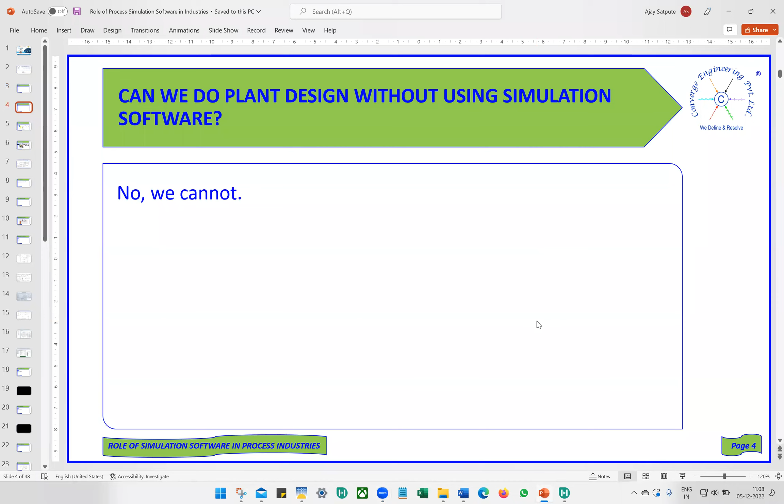To answer this question, the simple answer would be no, we cannot. And probably we can conclude this session with this answer. But anyway, we are going to spend another 30-40 minutes discussing why we cannot.

Right? So let's take this simple example. Actually, I had planned last weekend to give a detailed presentation on what are the different softwares available, when they came in the market and how they progressed. But while I was preparing that presentation, I myself got very sleepy. So I thought I should not do that with you guys. I made this thing very simple instead.

Whatever project problems I have come across during my 20 plus years of experience in process industry, I have taken a few. And with those examples, those project problems, I'll be making my point on why simulation softwares are important, and we cannot really do anything without using the software.

So in this particular example, benzene, there is this vessel which is operating at say 1 bar gauge pressure, you see here, and we want to load it to say some road tanker or send it to some other place at 30 meter cube per hour and at say 4 bar gauge pressure. So when I say that we need to design this system, I mean I need to design this pump, right? I will decide what is this pump suction line size, pump discharge line size, what is the pressure drop. You can see there is one control valve.

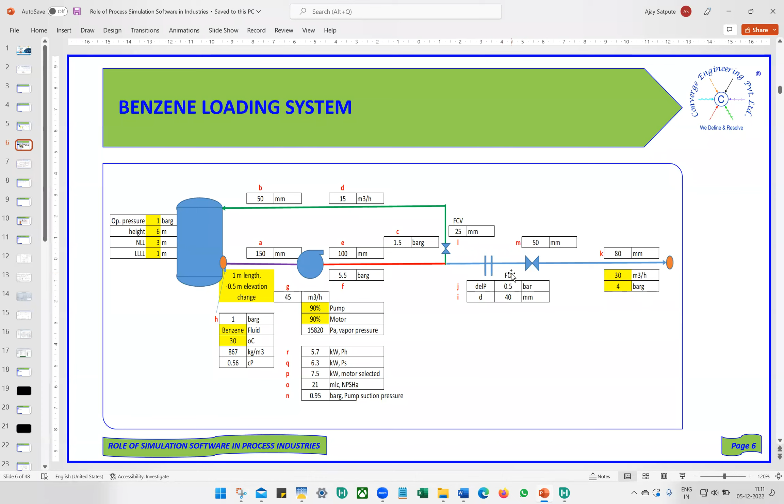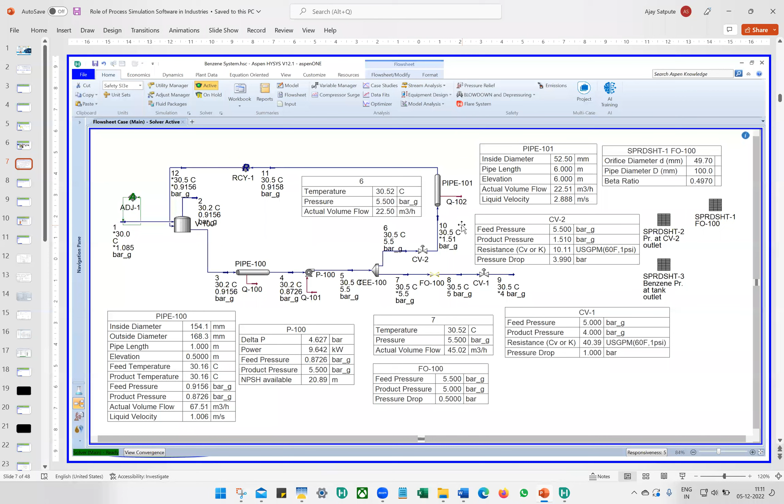Also we can do the same thing using Aspen HYSYS or any other commercial software. So we have this pipe 100, that is the pump suction. Then there is this pump. So we can find out what is the NPSH available. We can find out what is the head required for the given flow rate. And then this minimum flow control valve sizing we can do. The level control valve sizing we can do. The sizing of pump discharge, then pump minimum recirculation line.

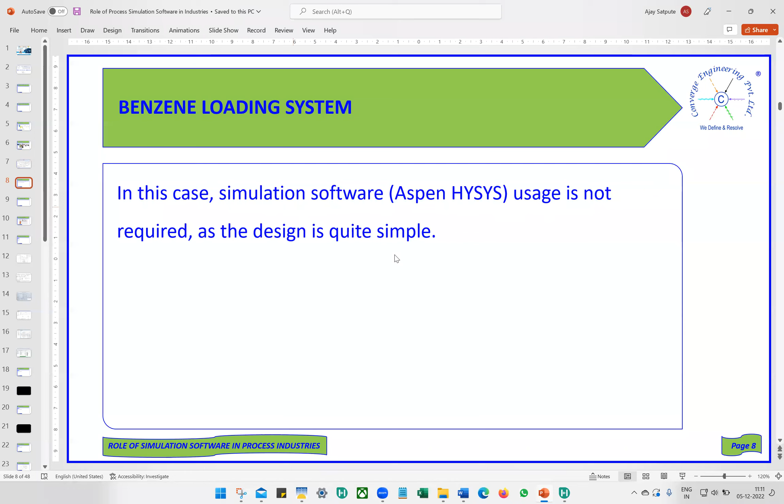So all this sizing we can do using Aspen HYSYS. In this particular case, simulation software like Aspen HYSYS usage is not really required, as the design is quite simple. So let us make things more complicated.

So we have this early production facility. In oil and gas, you cannot really do away with early production facility, or EPF. So whatever 2-phase or 3-phase fluid that comes out of the earth in the oil well, it goes to this...

Christmas tree, so there is this valve, choke valve. Upstream you can imagine very high pressure, say 5,000 psig, and downstream the pressure would be 500, 600 psig. That goes to the separator, preheater, heater. So it goes to many, many places.

The objective of this early production facility is to separate the gas, oil, and produced water. Oil is sent to the refinery. Produced water is again pumped back to the same reservoir. And then gas, if it is useful, meaning if it makes sense to process and purify it, then it is done. Otherwise, it is just burnt.

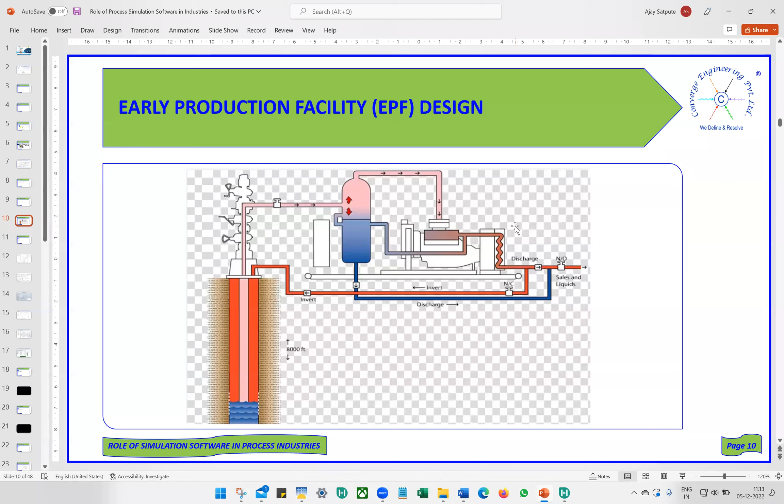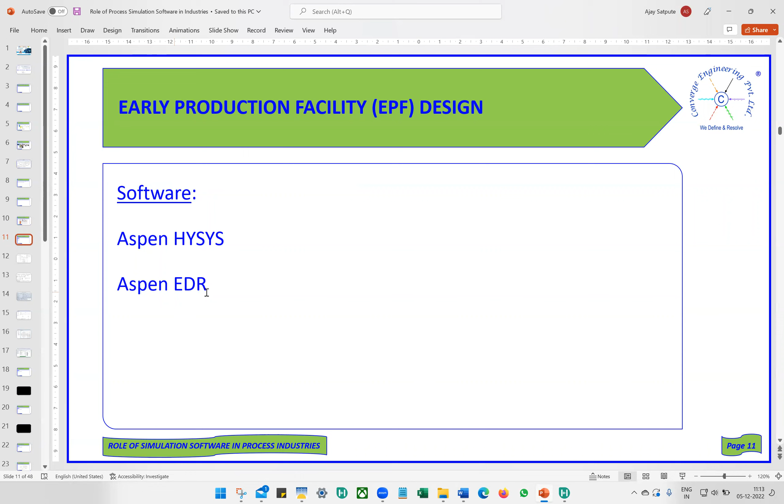So this kind of design of early production facility, we usually use Aspen HYSYS and Aspen EDR. Aspen HYSYS for the process simulation, EDR is for the heat exchanger side. So this is, you can say, a simple P&ID for the same system.

From the oil well, you have this 2-phase feed, oil and gas, which goes to the preheater, a shell and tube heat exchanger. Then it goes to the heater, and temperature is increased. It goes to the separator. Vapor goes out through the vapor line through the pressure control valve, PCV, and oil is pumped out using these 2 pumps, one running, one standby. It goes through the flow orifice, then to the LCV, level control valve. Then through the preheater, it goes out to the storage tank, or wherever it needs to go.

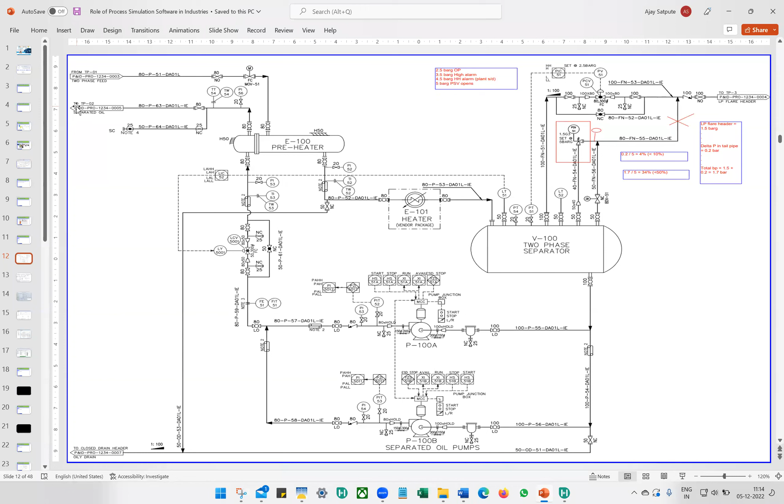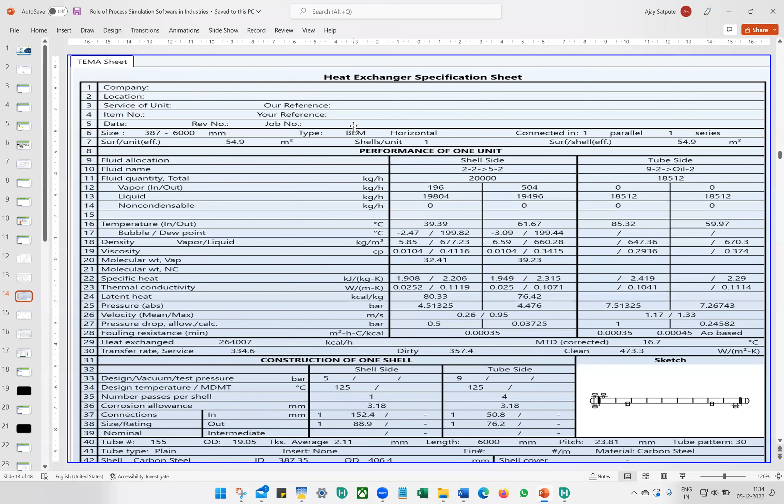Now this system we can very well simulate in Aspen HYSYS. It will have the preheater, heater, separator - all the sizing we can do using Aspen HYSYS. The heat exchanger, preheater sizing, we can also do using Aspen EDR. From EDR we can get the mechanical drawing of the heat exchanger - this is the TEMA sheet.

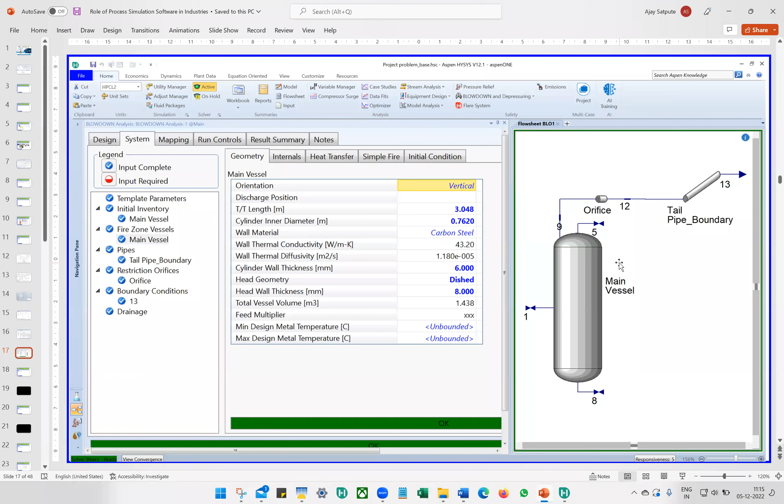In order to depressurize this separator, the sizing of this restriction orifice can also be done using Aspen HYSYS. Now the heat exchanger or this orifice sizing for depressurization, we cannot really do using Excel calculations - it's not that we cannot do it, but if you choose to do that, the accuracy will not be there.

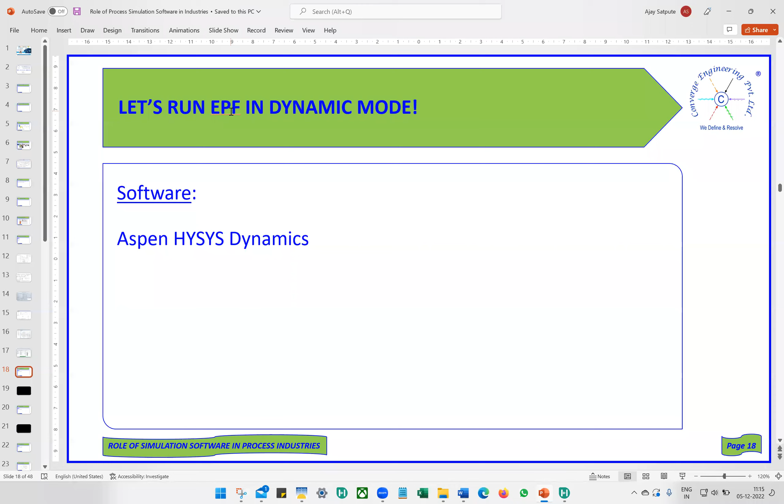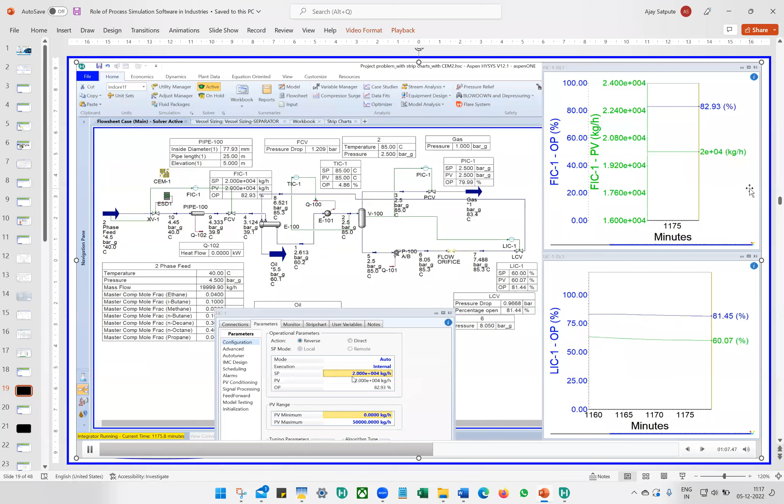So now you can imagine, if you don't do the simulation in Aspen HYSYS Dynamics - if you wanted to use Excel, you will not be able to get this kind of output. So this gives you the real picture of how the system, which you are designing, will behave when you actually run it.

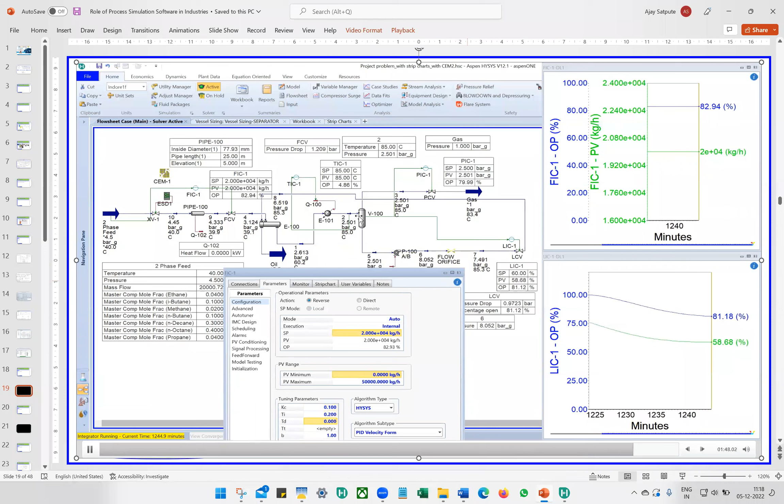So if you're using Aspen HYSYS steady state, you can make the steady state model. If you're using Aspen HYSYS Dynamics, you can actually run the plant and see what will happen if you close the XV-1 ESD valve, or what will happen if the PCV, pressure control valve, becomes fail-closed. So all these scenarios you can study in simulation software that you cannot really do using normal Excel.

We go to the next example. Here also we are using Aspen HYSYS Dynamics, this for the compressor surge analysis.

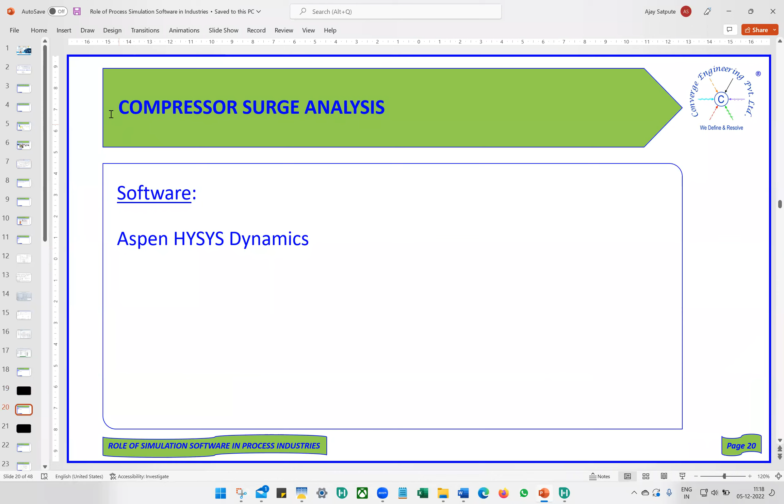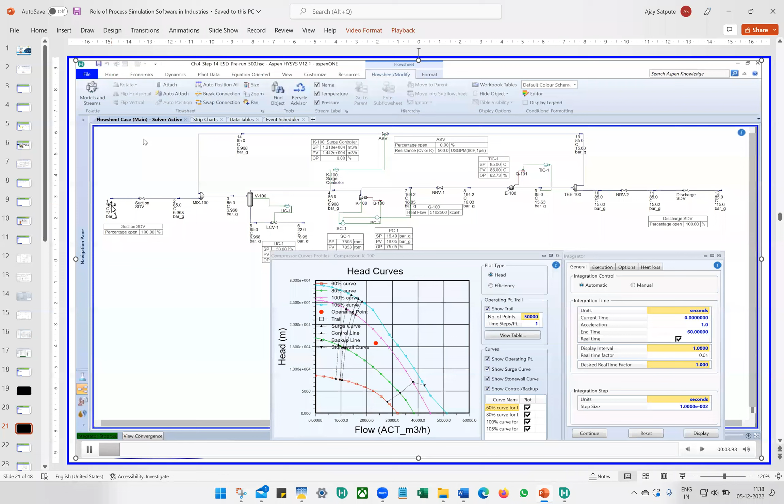So the system is something like this. You have this gas stream number 1. What is stream number 1 pressure? 7 bar gauge, 85 degrees C. And what is the composition? You can see composition is methane, so this is basically the sales gas. You want to compress from 7 bar gauge to - you see the last point here, 12 - the pressure is 15.6 bar gauge. So that is my problem state.

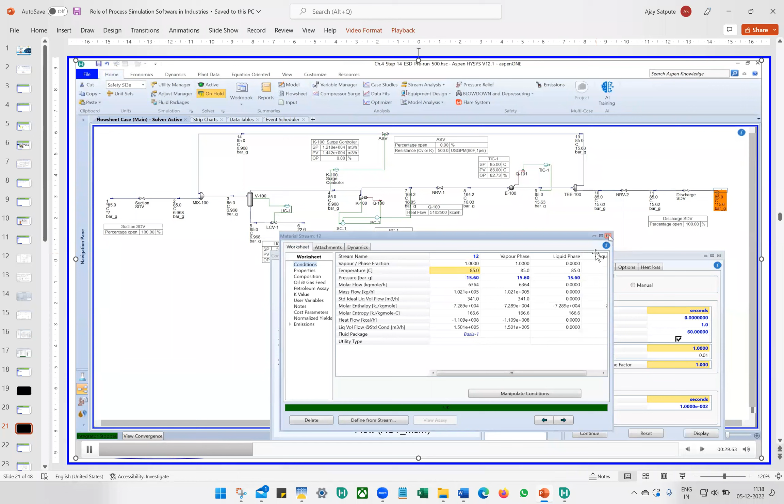Using Aspen HYSYS software, we can do the steady state simulation. But if we want to run it in dynamic mode, let's say we have this event scheduler.

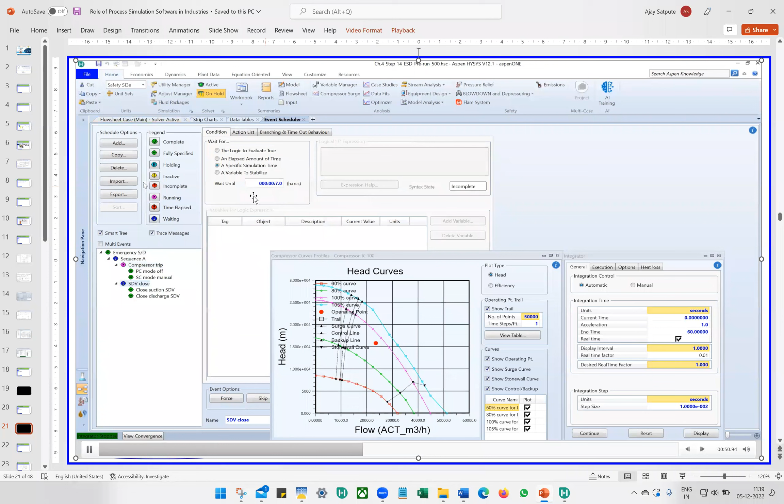For the first 5 seconds, I don't want to do any tripping of this compressor. After 5 seconds, the compressor will get tripped, and after 7 seconds, both the suction shutdown valve and the discharge shutdown valve will be closed.

We can simulate this in Aspen HYSYS Dynamics, and we are going to run it for, you can see here on the right side bottom, 60 seconds. This red point is the operating point. Let's see what happens.

Till the time is 5 seconds, nothing will happen, the operating point will not change. But as 5 seconds are over, the compressor is going to get tripped. Then the RPM, you can see here, was 5.3, now it is 4.900. So the compressor is slowing down. This kind of simulation we can do.

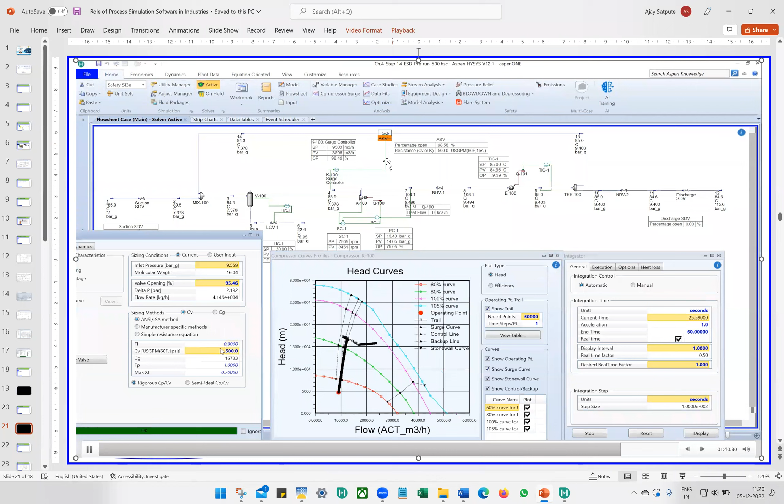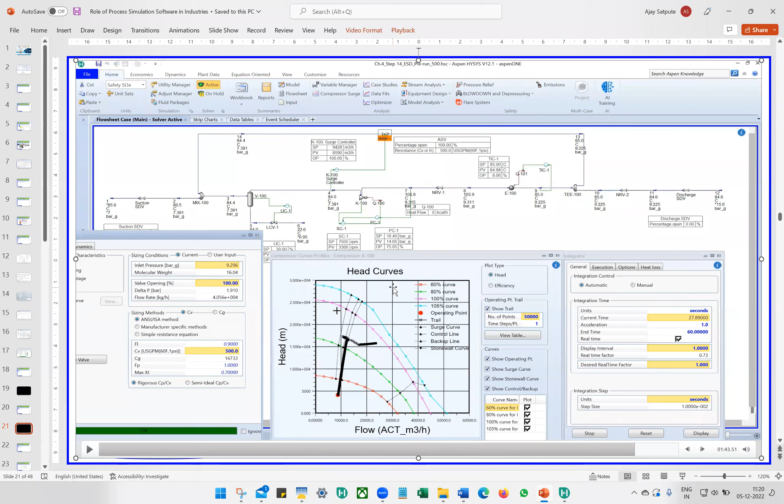What is the objective of this simulation? The objective is we need to safeguard this compressor, which we can do using the anti-surge valve, ASV. If I have adequate capacity ASV, like in this case using 500, the compressor will not cross the surge curve, meaning the compressor will not have any mechanical damage. But if you use a small size or small CV ASV, then this 10-15 crore cost compressor may get damaged. We can establish this with this study.

This is called compressor surge analysis, and this we can do using Aspen HYSYS Dynamics.

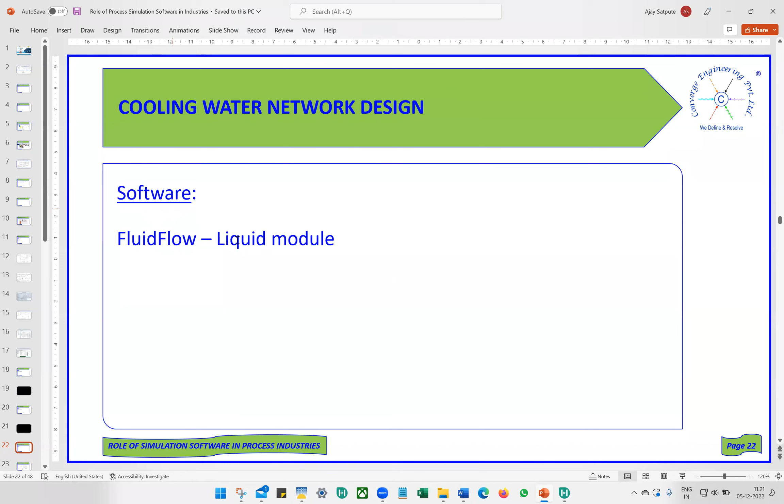Now let us move to the cooling water network design. Again, the software here would be the FluidFlow liquid module.

What do we understand by cooling water network? You must have seen a cooling tower. What is its objective? The cooling tower will take warm water, say at 40 degrees C, and cool it down to maybe 30 degrees C. That 30 degrees C water is sent to the cooling water supply pumps, and then sent to the entire plant, to different heat exchangers. On one side there is utility cooling water, and on the other side the process fluid.

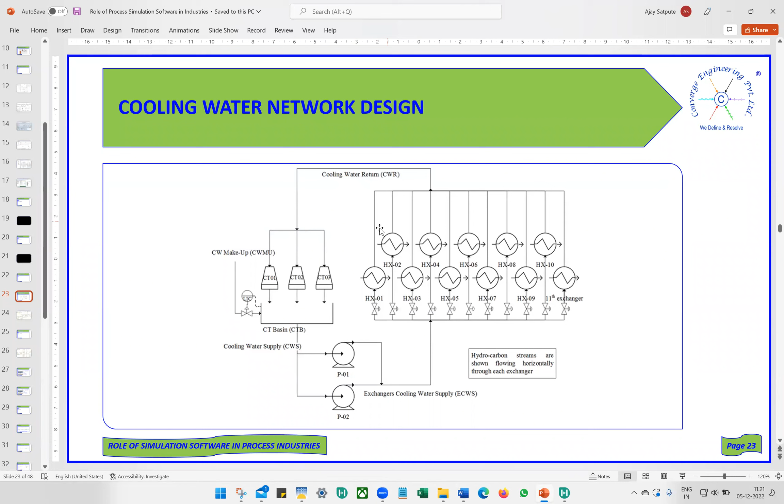Let's say hot methane gas you want to cool down in heat exchanger number 1. The water will be supplied from the cooling water supply pumps, similarly to heat exchangers 2 and 3. There are a total of 11 heat exchangers in this figure. We can simulate such a system using FluidFlow software, which is again a hydraulic simulation software.

This is the cooling tower basin, the starting point, and then water goes to these 2 pumps, one running, one standby, and it goes through different heat exchangers. In this example I've shown only 3 heat exchangers, but you can have n number. In one of the projects, we had modeled 170 heat exchangers, for one of the refineries in Madhya Pradesh.

The temperature rise is about 10 degrees C, and then the warm water gets collected in this return header, and again goes back to the cooling tower top. From top to bottom, again temperature drop will be there because of mass transfer with the ambient air. So this is basically the system.

The line size and line length will be as per the piping isometry. The objective of this study would be to check the adequacy of, let's say, the existing system. You can see the pump suction line is 12-inch, and velocity is 1.1 meter per second. As per API 14E, the standard we use for line sizing, this velocity is okay, meaning this line size of 12-inch is also okay.

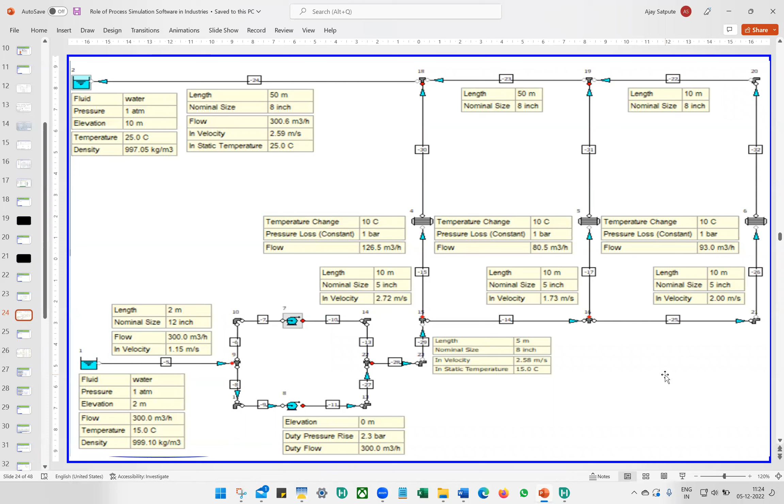You can do this single pipe pressure drop calculation using Excel. But when you're talking about simulation of the network, you cannot really do that using Excel. So you have to use some simulation software like FluidFlow.

We can also do firewater network design. What do we mean by firewater network design? Let's say there is this pump house with, say, 6 pumps in it. Now we need to protect the pump house in case of fire. How do you extinguish the fire?

Using water, and that water is coming through the sprinklers. How many sprinklers do you see here? Total 12 sprinklers are there. Now, how do I know that the pressure available for the water when it is needed would be adequate or not? That we can determine using simulation software.

Now, in this case, we are using FluidFlow liquid module. The typical fire water system would be comprised of fire water storage tank, then fire water supply pumps. Typically one electrical, one diesel operated pump will be there, big main pump, and then 2 small pumps, also called jockey pumps. Here we are only considering 2 main pumps, one running, one standby. Then on the discharge side, there will be one deluge valve, and then the piping and the sprinkler.

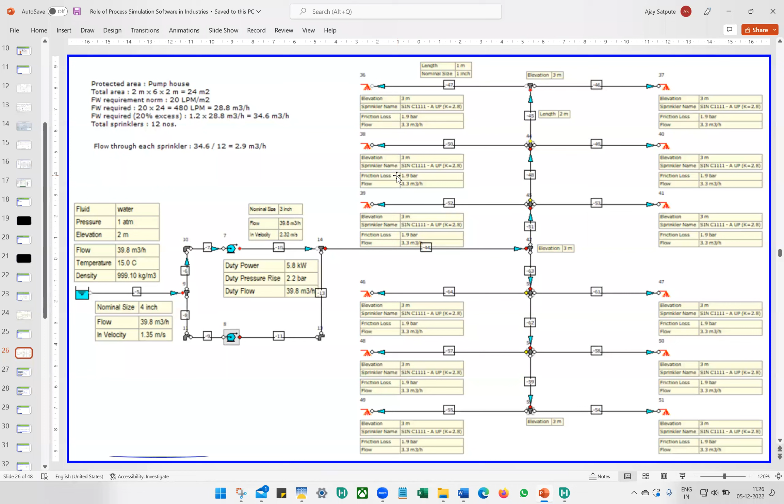Once you run the system, you find that upstream of the sprinkler nozzle, the pressure is 1.9 bar gauge, and flow rate would be 3.3. If this flow rate is more than what we require, say 2.9, then we can say the pump selection is adequate and the line sizing is done properly. We cannot really do this using Excel, we have to use simulation software. We can also do the surge analysis using simulation software like PipeNet Transient.

Just look at this example. We have this pipe with the valve. This valve is closed, that's why the water is still, there is no flow. Let us say we open the valve and water starts going from left to right. If you suddenly close this valve, what will happen? The slug of water will be banged against this valve and it will create some pressure surge.

There is this Joukowski equation. We can calculate how much pressure surge will be there. It is minus rho C multiplied by delta V. So rho is density of water in this case, C is the wave speed, meaning velocity of sound in that particular liquid, and delta V is the velocity change.

Say in this example, let us say it's not water, we are talking about some other fluid, say oil. So oil density is say 800 kg per meter cube, the wave speed is say 1380 meter per second, and the velocity change is say 2 meter per second. So this particular system has got all the potential to have the pressure surge of 22 bar. If the design pressure of this pipe is say 16 bar gauge, then the pipe is in danger if you suddenly close this valve. So it is quite a serious situation, and it's a real problem.

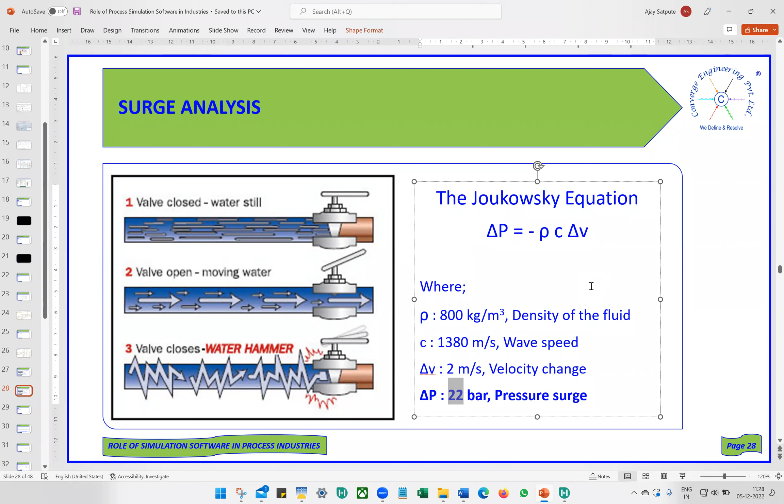So people spend a lot of money to find out whether the system is safe, and if not, if there is any remedial action that we can do to protect the system. So this study is done using PipeNet Transient software. Let us say the example is crude oil transfer from storage tank to ship tanker. Say HPCL Mumbai refinery is sending the oil to ship tanker in Mumbai Port Trust. So it is quite a 6-7 kilometer long pipeline.

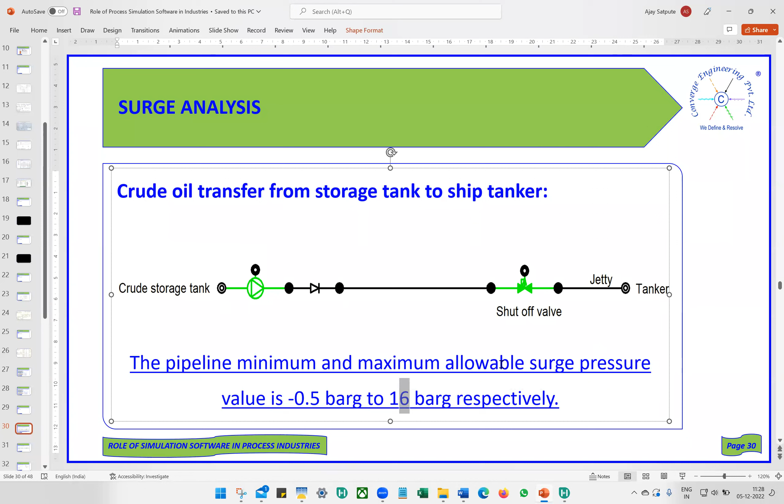The pipeline's minimum allowable surge pressure value is say minus 0.5 bar gauge, meaning it can withstand 50% vacuum in the pipe, and maximum is 16 bar gauge, that is the maximum allowable surge pressure. So case one would be without any surge alleviating device. This we can do using PipeNet Transient. So you see this case.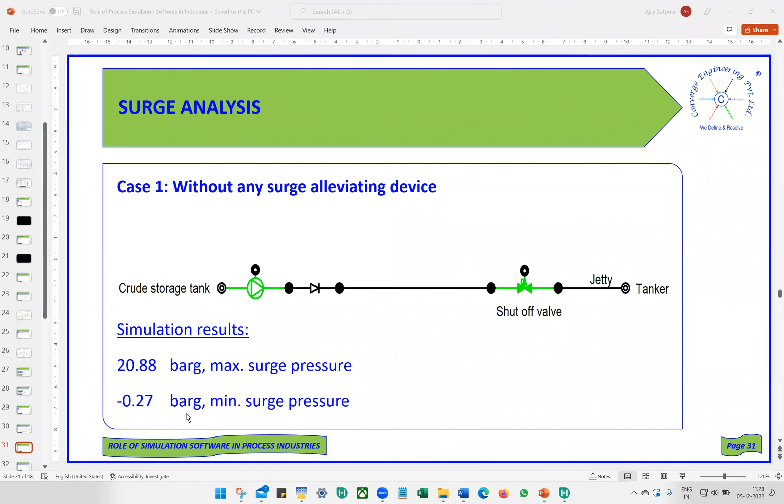So this is the pump, this is a shut-off valve, and it goes to the tanker. The shut-off valve, you see here on the right side, is taking from 2 seconds to 27 seconds to close completely, meaning 25 seconds it is taking to close from 100% open to 0% open. So because of that, if you run this...

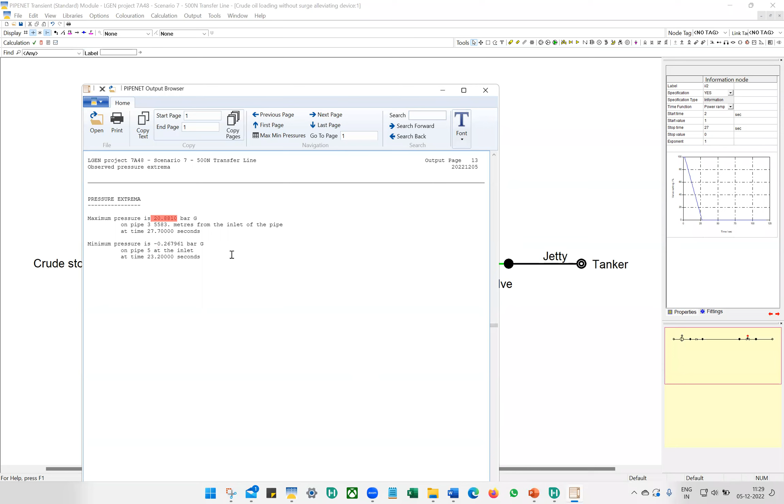If you run this, it will tell us that the maximum pressure it will have is 20.8 bar gauge, and the negative pressure is going to be minus 0.27. Since the minimum allowable surge pressure is minus 0.5 bar gauge, we don't have any problem with the minimum surge pressure, but the maximum is exceeding 16 bar gauge, which is a concern. So we cannot let this system run without any surge alleviating device.

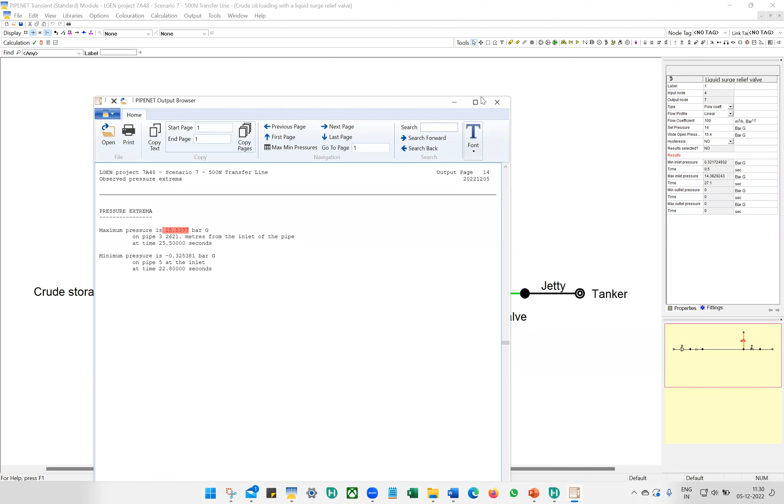So what we do in this example, you see here, is add a liquid surge relief valve with the set point of say 14 bar gauge. Once I add this and run it, you can see the maximum pressure is now 15.5 bar gauge. What is the maximum it can withstand? 16 bar gauge. Meaning I have made the system safe by adding one liquid surge relief valve.

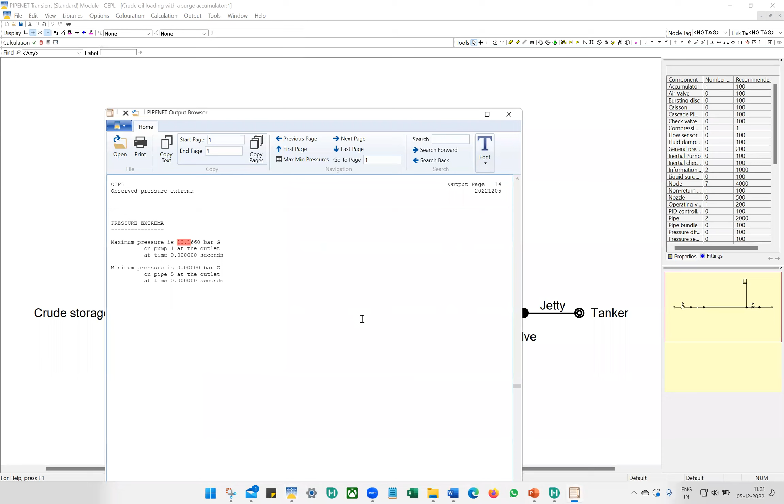So there is one more thing one can do, which is adding one surge accumulator. So again, if I run this and try to find out what is the maximum and minimum pressure, you can see it is 10.1 bar gauge maximum, minimum pressure will be 0. So which option will be better, the second or the third one?

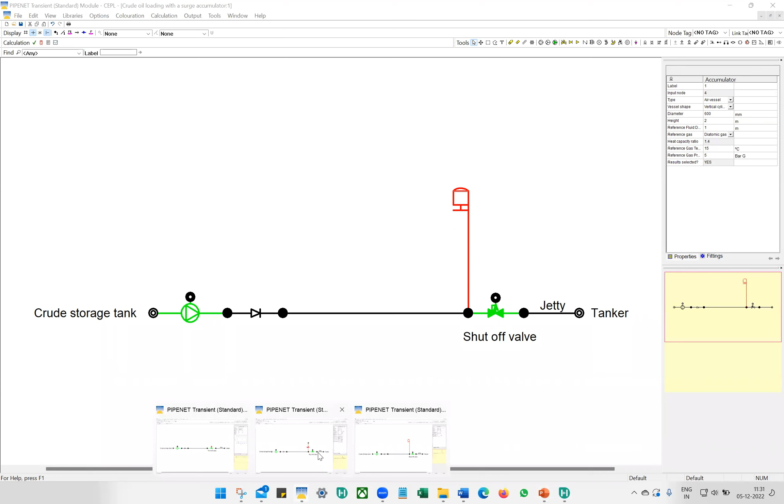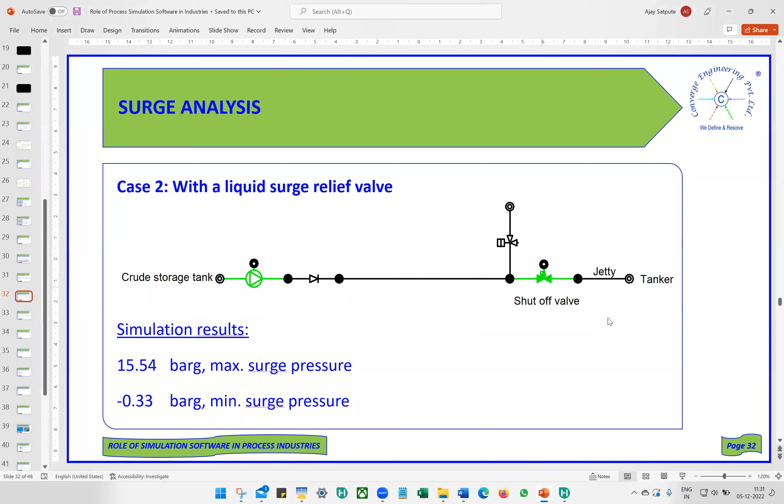This surge accumulator option is expensive because it will require compressed gas or nitrogen cylinder, and frequent maintenance will be there, and the operator will have to be very careful with this particular system. So we are talking about a lot of money when you go ahead with the accumulator option. But the second option, with the liquid surge relief valve, is quite cheap and it will solve the problem. So this way we can take a decision to go ahead with option 2, the surge relief valve, instead of going ahead with the surge accumulator.

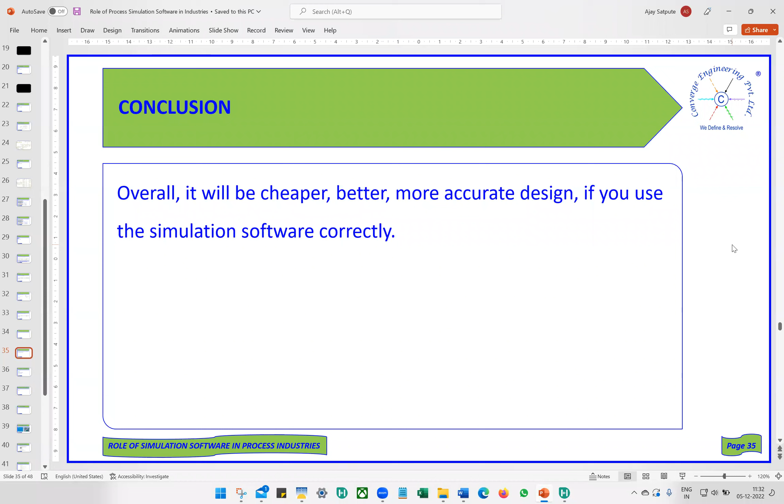All right, so the conclusion: overall it will be cheaper, better, more accurate design if you use the simulation software correctly. Now this word correctly is very important because in simulation we always say garbage in, garbage out. So you have to understand how the simulation software is using your data. That means you must know what formula it is using, what philosophy it is using. If you say I will not go into how the software is using your information but I will just use the data, then your design will never be correct.

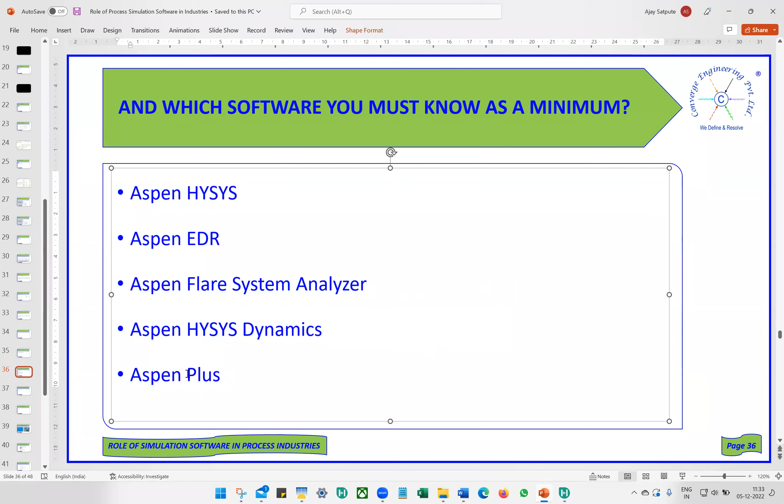And which software you must know as a minimum: Aspen HYSYS is there, Aspen EDR for heat exchanger sizing, Aspen Flare System Analyzer or FlareNet for flare header design, Aspen HYSYS Dynamics to carry out some dynamic studies, Aspen Plus is there. Aspen HYSYS is very popular in the oil and gas industry, but if you want to do projects in chemical or pharmaceutical companies, then you must use Aspen Plus. Then there is fluid flow software and PipeNet - these two are the hydraulic simulator software.

And how can one learn these softwares? All right, so now a little bit of marketing of Converge Engineering. I wrote one book, Process Plant Design and Simulation Handbook. This is an extremely good resource for learning Aspen HYSYS.

So if you have Aspen HYSYS installed on a laptop, and if you have this handbook, you can learn the software very easily. It also has some chapters, three chapters for steady state and two chapters for dynamic simulation, and it will tell you how to do line sizing, controller sizing, separator sizing, orifice sizing, how to design the entire plant, and how to run that plant in dynamic mode. So it is quite a useful resource.

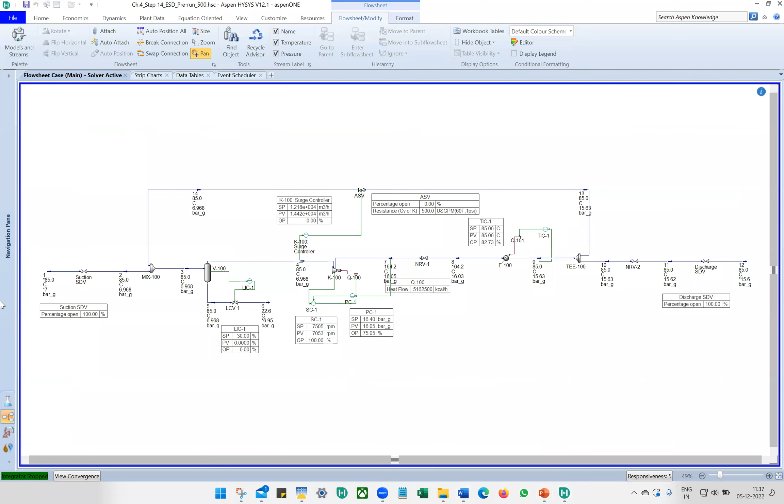Yes sir, all right. So the objective is, first of all in steady state we use Aspen HYSYS to model the system. And if I want to run this using Aspen HYSYS Dynamics, I should be able to do that. Say for example this is a compressor example - see that? So we already use steady state to do proper sizing, line sizing, valve sizing, etc. But if I don't use Aspen HYSYS Dynamics, I will not be able to do the sizing of this anti-surge valve. So here we do trial and error.

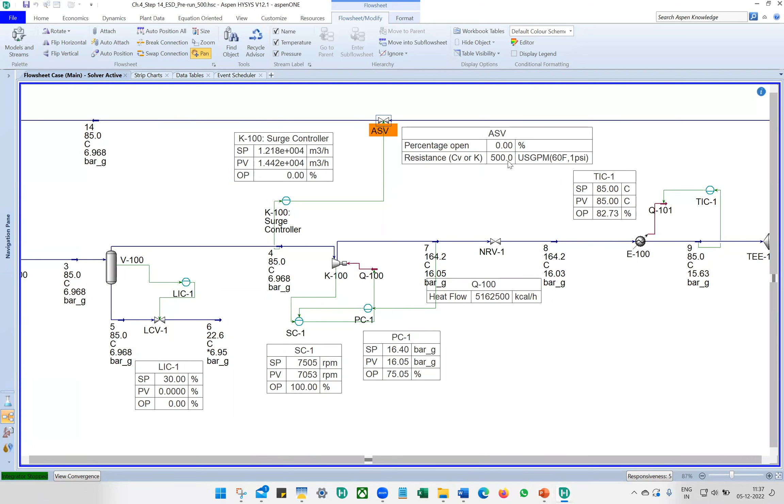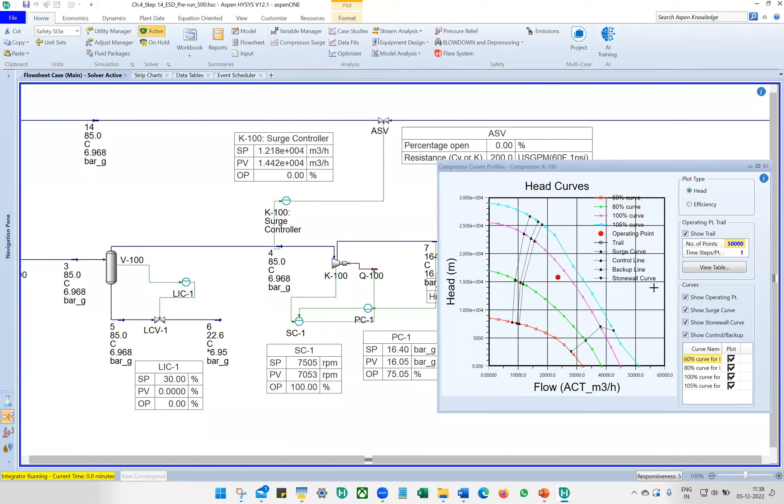So after 5 seconds, the compressor will get tripped, and you can see this operating point has crossed the surge curve. We should not have the operating point crossing the surge curve - that will damage the compressor in no time. We cannot do this analysis of what should be the size of this ASV using steady state; you had to go for Aspen HYSYS Dynamics. Does that answer your question?